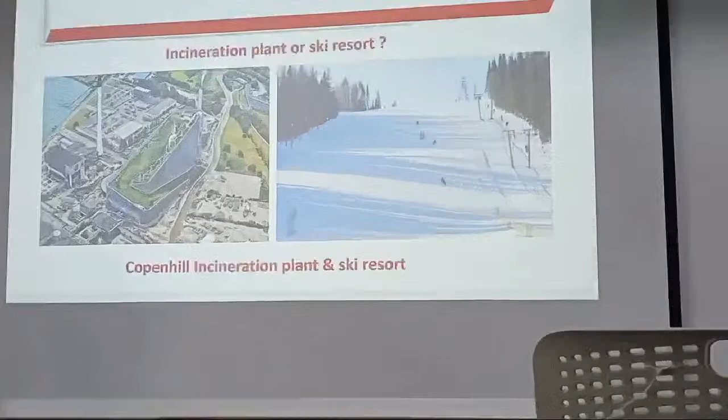They can use the electricity to generate snow and cooling in this area. In this case, what they can get from this project is not just the sale of electricity. They can also sell tickets. If you want to go to the ski resort, you need to pay for that. It's higher, much higher than the cost.

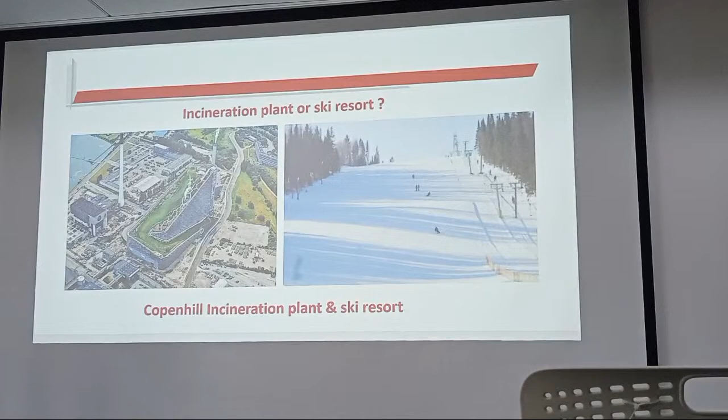The value is much higher compared with sale of electricity. In some other cities and countries, they also have similar thinking for the use of electricity and heat from the incineration plant to operate the ski resort. In this case, they can get more value. It's a very interesting idea.

Okay, now let us watch this video to see the whole incineration process.

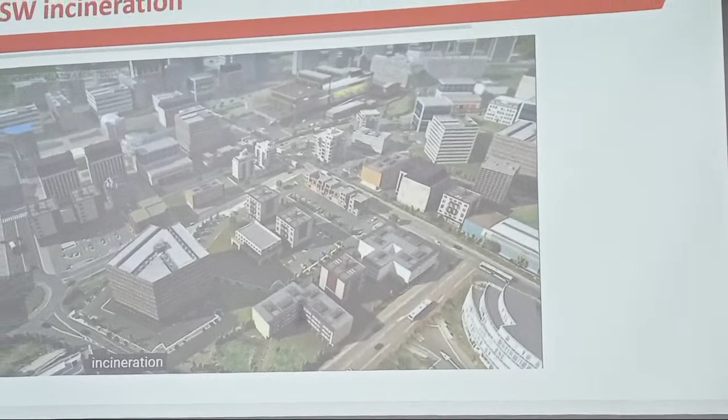This technology is not new, it's a mature technology worldwide. Currently, the most important part for this incineration plant is to develop new technology to use the bottom ash. The incineration technology itself is mature already, but the challenge is to develop new technology to reuse the bottom ash. It's a very hot topic.

Okay, now let's watch this video to see the whole incineration process.

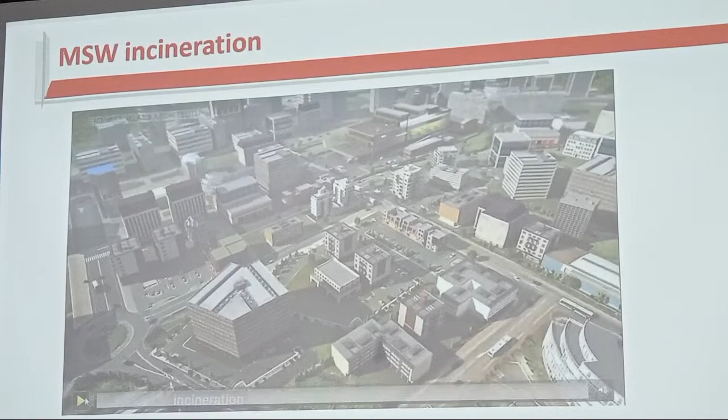Incineration of waste can provide municipalities and industrials with electricity, heating, and process steam. Here's how and why, at a glance.

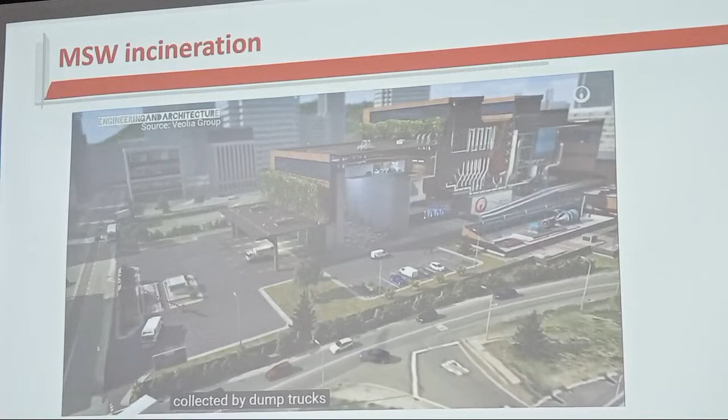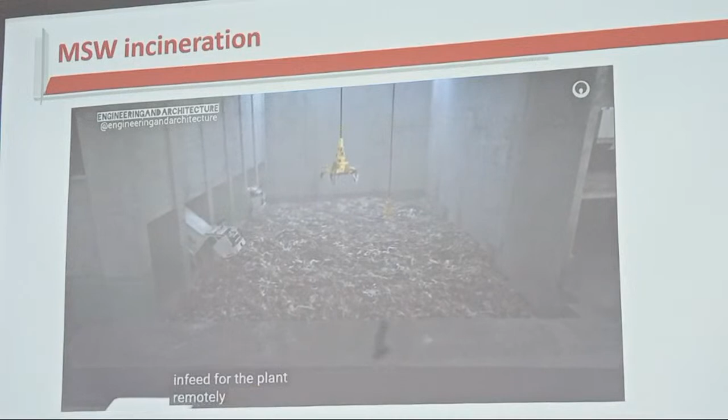Collected by dump trucks, the waste is delivered to the incineration plant, where it is weighed, then tipped into a pit that is sufficiently big to provide continuous infeed for the plant. Remotely operated, the grabs have a dual function: they mix the waste to make it homogeneous, and they feed the combustion furnaces.

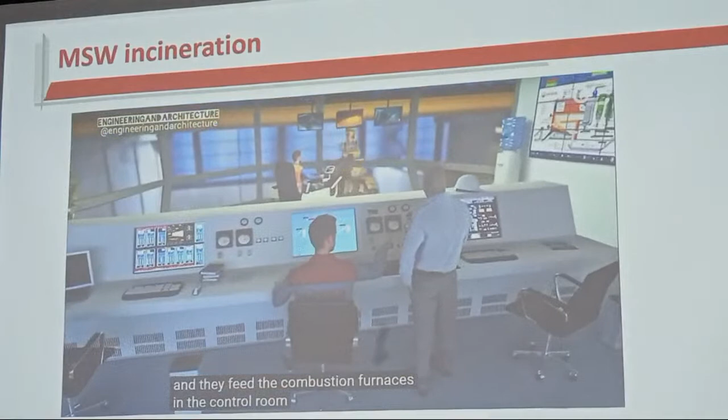In the control room, technicians control the facility's operation and the quality of the atmospheric discharge. The waste is tipped into hoppers to supply the furnaces and then burnt at a very high temperature. The plant is maintained under negative pressure to prevent any odors or off-gas from escaping.

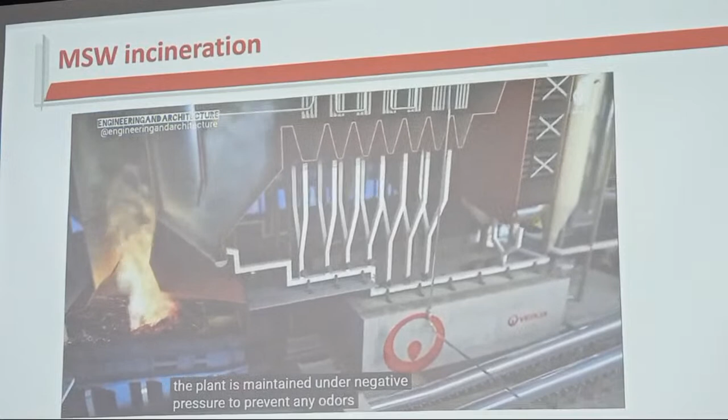The clinker, the solid residue from incineration, is removed by a conveyor belt and stored. It will be recycled as earth-moving material for sub-base roads.

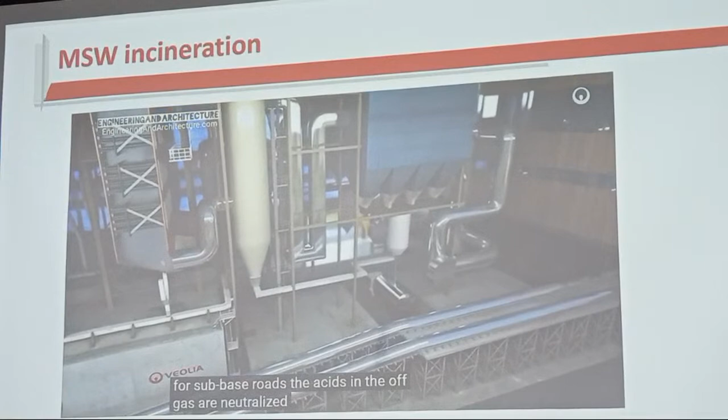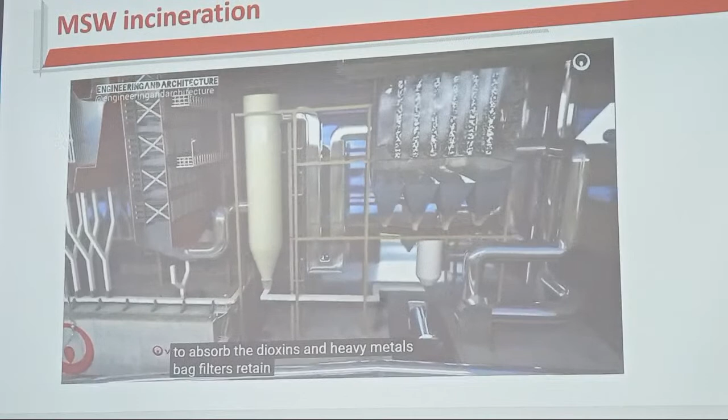The acids in the off-gas are neutralized in a reactor by injecting lime and sodium bicarbonate, to which is added activated carbon to absorb the dioxins and heavy metals. Bag filters retain the dust, salts, and other solids, which will be sent to a hazardous waste landfill.

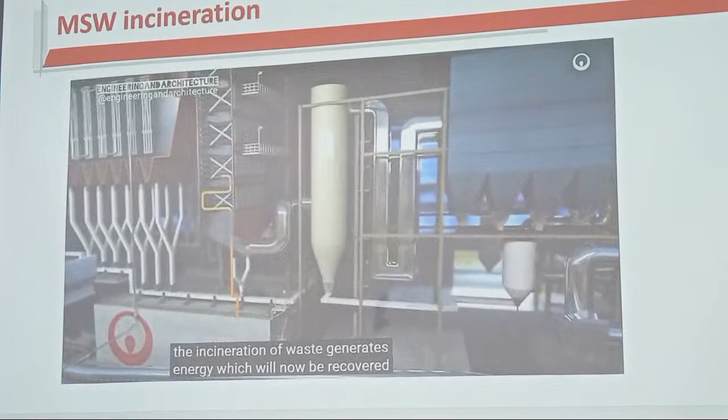The incineration of waste generates energy which will now be recovered. The heat is captured by the water tubes installed in the boiler walls. The heated water is converted into high-pressure steam in a tank.

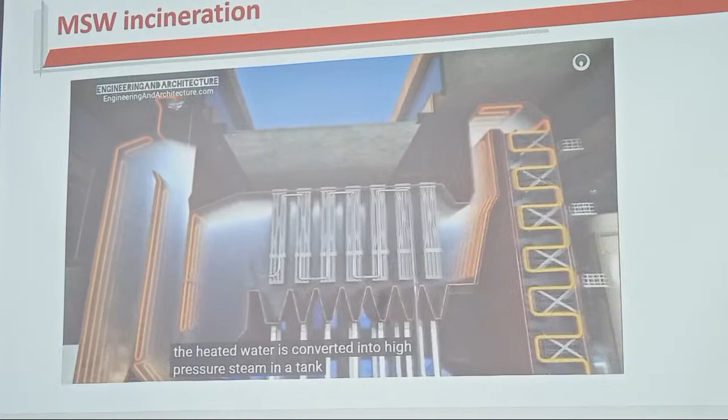This steam, superheated in high-temperature exchangers, is sent to a cogeneration plant. Cogeneration both produces electricity and recovers residual heat.

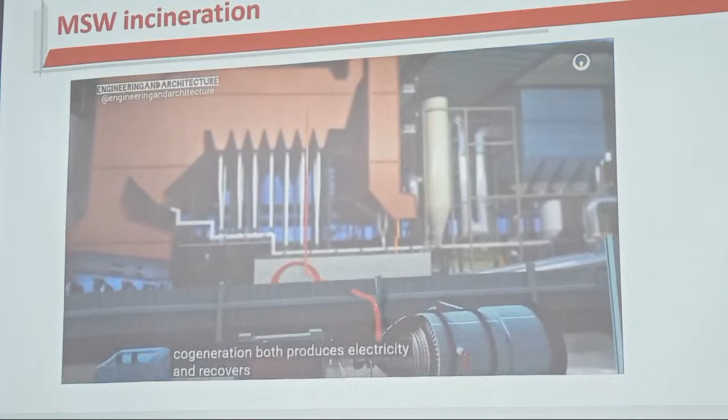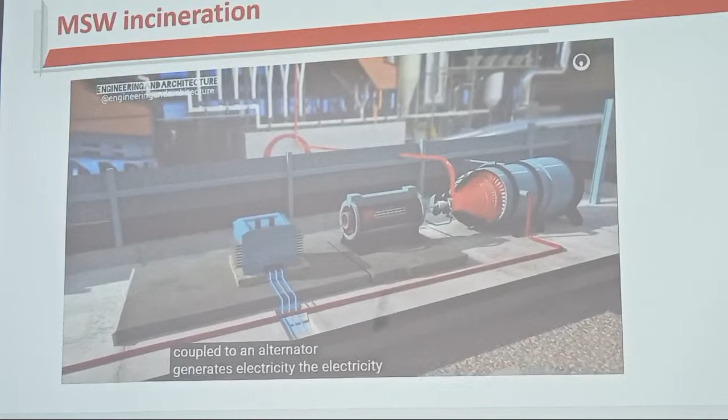This steam drives a turbine which, coupled to an alternator, generates electricity. The electricity is fed into the public grid. The residual heat, generally lost, is recovered here in a heat exchanger to supply local residents with heating or hot water.

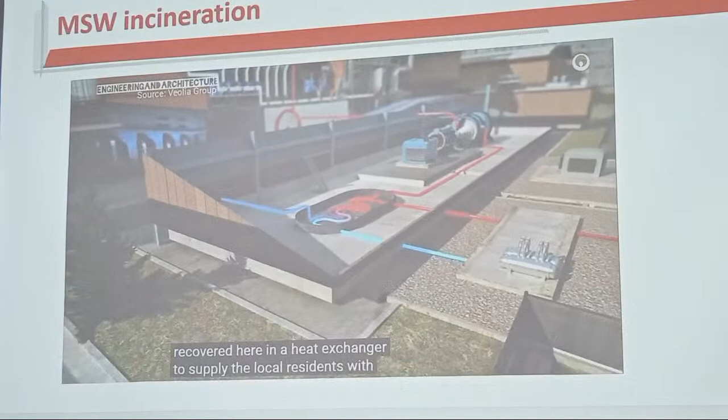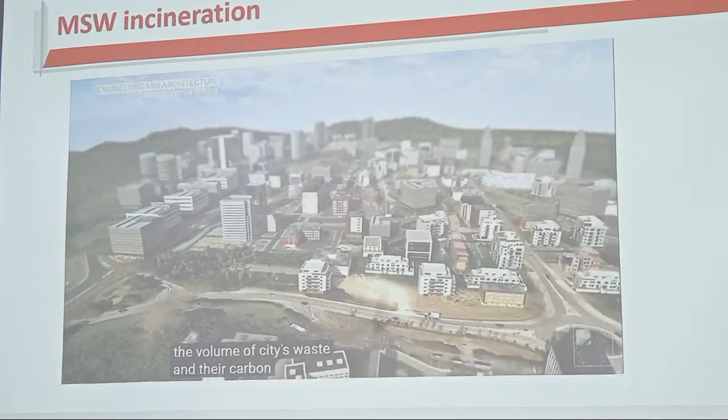By transforming non-recyclable waste into a source of renewable energy, our circular economy solutions reduce the volume of cities' waste and their carbon emissions. Okay, this is the end of incineration of waste.